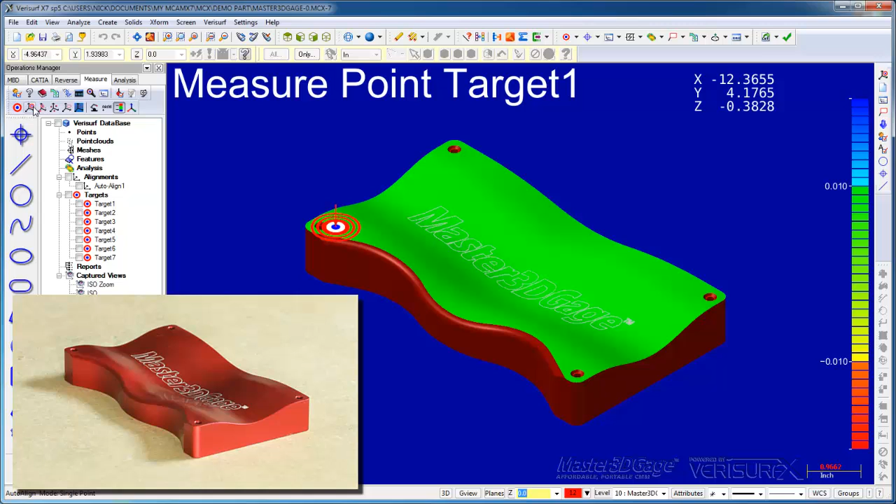The system uses bullseyes to guide me to the alignment points, and when the alignment's complete, I can go directly to inspection.

As I move the probe across the surface, I get an analysis of the deviation between the part and the model.

And when the measurements are complete, I have an analysis of the part. I'll add balloons to it to show the limits, save it, and create a report.

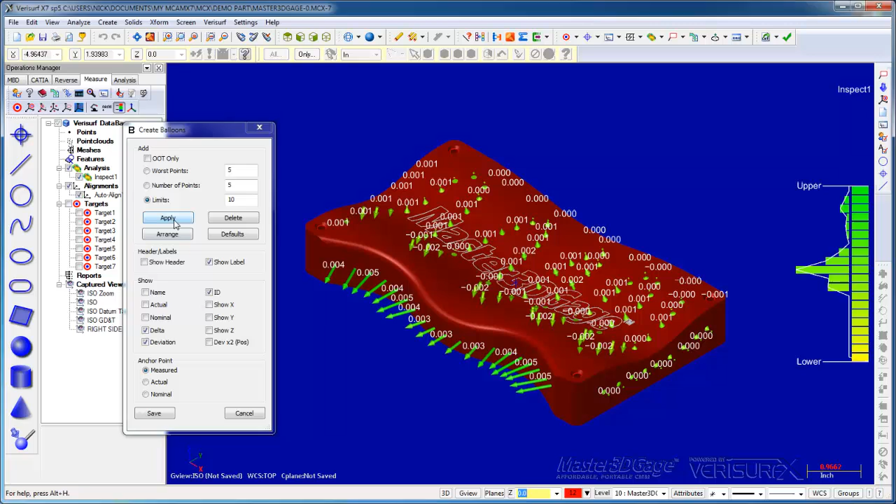When I open up the PDF file, I can see the part's in tolerance and I'm ready to continue my run.

The Master3DGage is the fastest way to align, inspect, and report, which makes it ideal for rapid first article inspections. It supports continuous process improvement.

It eliminates programming, which makes it faster than a fixed CMM for most applications. It provides a common platform for manufacturing and inspection, and it adds tool building and reverse engineering to your inspection tools. Finally, it improves inspection throughput and generally lowers the overall cost of quality.

We've seen an overview of what the Master3DGage does and how it can benefit your manufacturing process. Next, we'll take a closer look at the system.

The Master3DGage system comprises both hardware and software. The gauge itself is a 6-axis articulating arm CMM that uses a hard probe to measure 3D points and point clouds. The arm has a 4-foot volume, or a 2-foot reach in any direction.

It uses a TESA mount that allows us to swap probes without having to requalify. Accuracy is between 2 and 7/10,000ths of an inch for characteristics such as position or length, depending on the size of the object we're measuring. And for characteristics such as form, the accuracy is 3/10,000ths.

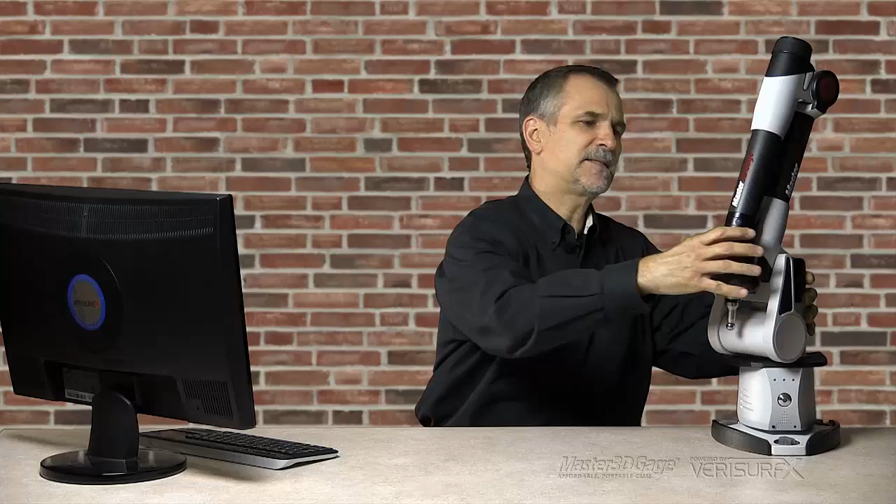Verisurf recently introduced a new and improved version of the Master3DGage, and I want to review the enhancements before we continue the demo. The new model offers the same portability, accuracy, and competitive pricing as the original, and it retains the same basic design. Measuring volume is 4 feet, or 1.2 meters.

Both USB and Wi-Fi communication are available, and the system runs off of either AC or battery power. The new Master3DGage is certified to the ASME B89.4.22 standard. Volumetric accuracy is 25 microns, or 1,000th of an inch, and point repeatability is 14 microns, or just over 0.5 thousandths.

The new Master3DGage also offers a number of design improvements. Absolute encoders enable instant startup, so you don't have to initialize the arm. The TESA mount, which allows quick probe changes, now features a keyless locking system. A new ergonomic wrist and single-piece counterweight make operation even easier.

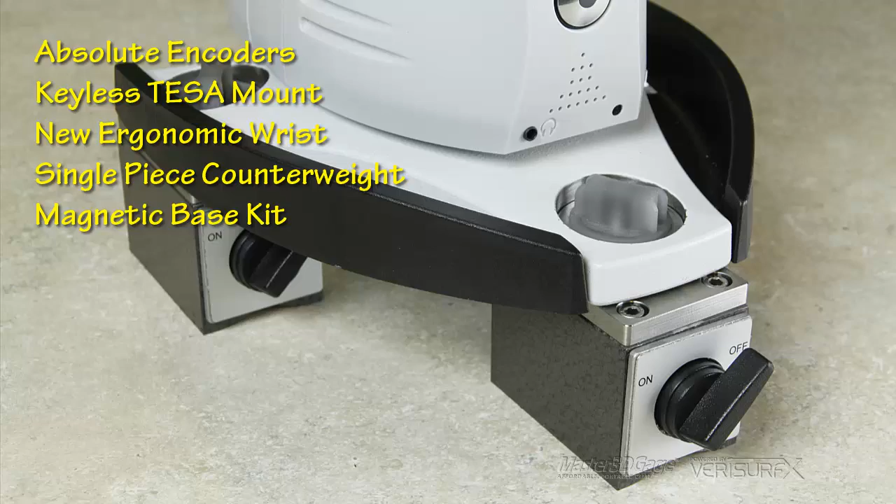The system includes a magnetic base kit for faster and more flexible mounting. The optional certified length bar allows user verification of system accuracy, and we highly recommend it.

The new Master3DGage is still portable, accurate, durable, and easy to use. In the segments that follow, I'll show you how to use Verisurf to align, inspect, build, analyze, and reverse engineer using the old model, but the workflows are identical using the new hardware.

The Master3DGage runs inside Verisurf's metrology software, which is built on a CAD platform, giving us full CAD design capabilities. CAD is important for reverse engineering, but it's also very helpful when inspecting complex parts.

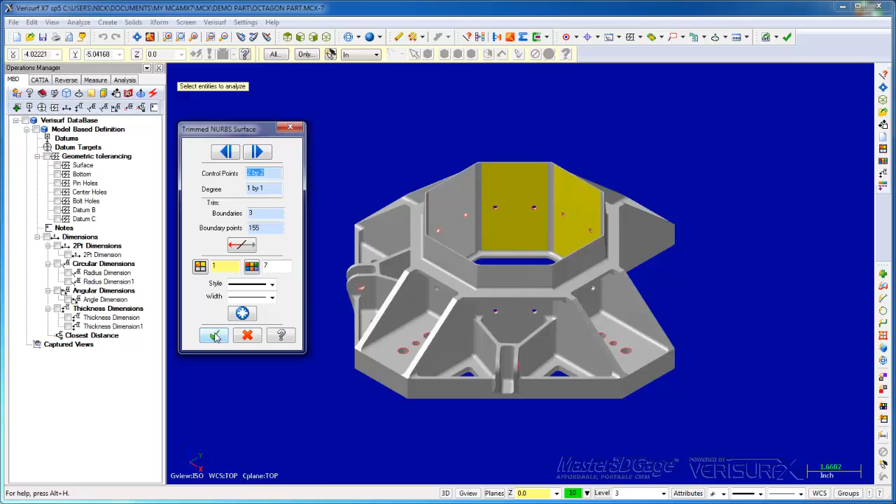For example, we can analyze the elements in the model. We can pull dimensions from the model. We can even manipulate the model, for example, to change or flip surface normals if necessary.

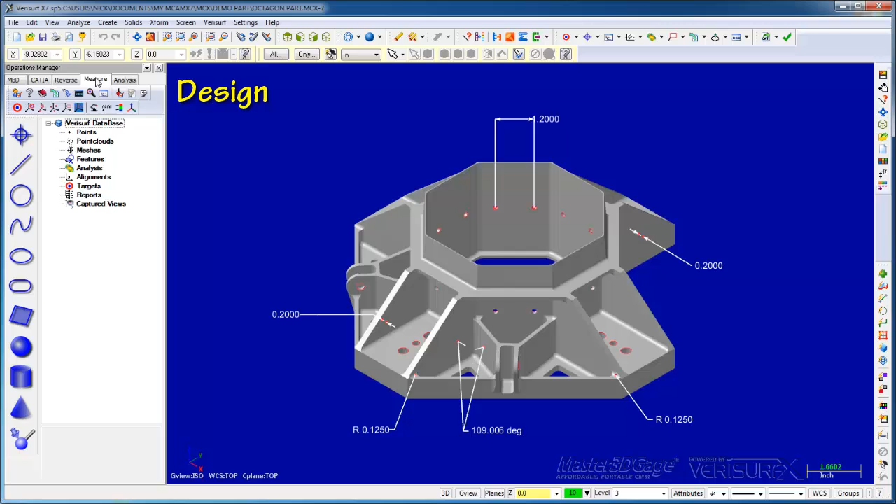Tools such as colors, levels, and attributes allow us to easily manage large part assemblies. Verisurf integrates design, inspection, tool building, analysis, and reverse engineering all into a single application. Finally, Verisurf is designed for both print and model-based workflows.

I'll start by loading a model of our demo part. Verisurf reads all popular CAD files, CATIA, NX, ProE, SolidWorks, in their native format. This helps avoid the limitations of neutral formats such as STEP and IGES, which Verisurf can also read. I'll start by opening a Parasolid version of our model.

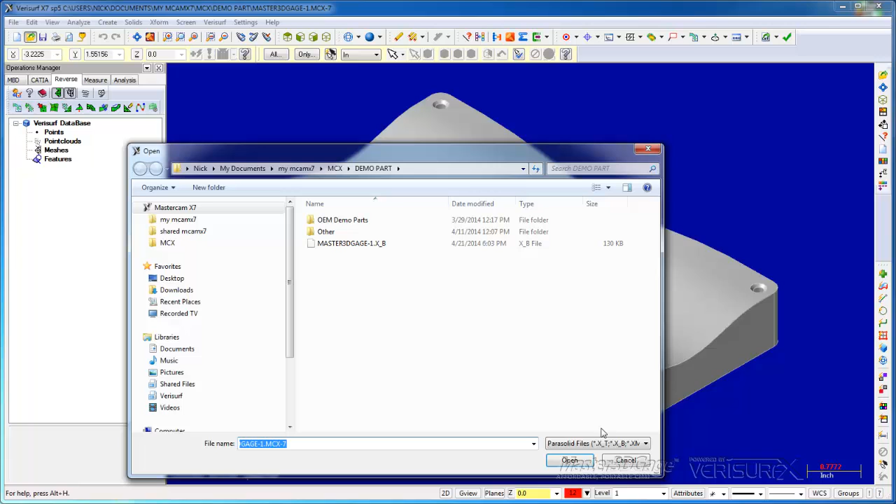When Verisurf loads a native model, it stores it in the MCX format and leaves the original file intact. All of the data we accumulate, measurements, reports, analyses, etc., are stored with the model. Using one file simplifies handling and prevents data loss. I'll reopen our model file using the MCX format.

We have the model loaded and the part is set in place. In the next step, we'll align the Master3DGage to our part. After we load a model, we typically align the device to the part so that we can get real-time feedback on tolerance condition. Verisurf offers a variety of ways to align the device to the part. We'll use AutoAlign since it's the easiest way to align to a model.

We start by creating alignment targets on the part. If our model has datum targets, that's where we place the alignment targets. Otherwise, we position them so they control the position and orientation of the part. I'll choose Create Target and then place 4 targets on the top, 2 on the front, and 1 on the end.

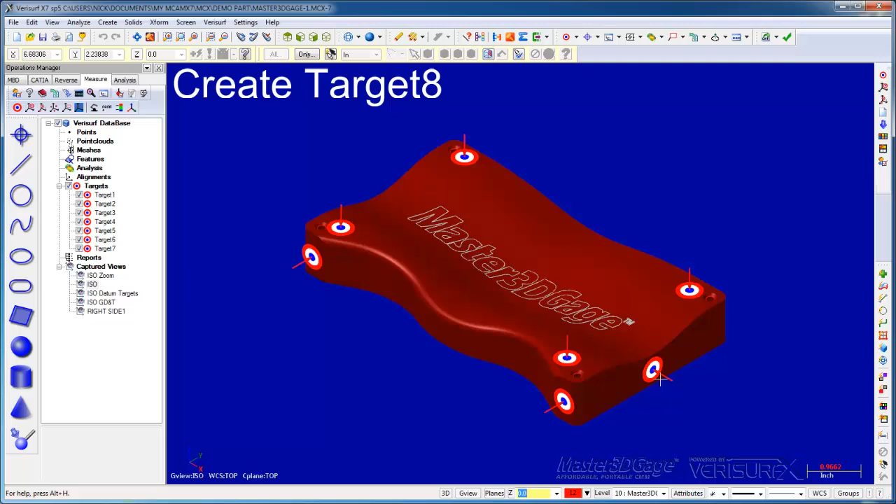To begin the alignment, I choose Run AutoAlign and then follow the bullseye around the part. After the 3rd target, Verisurf guides us to the remaining points. And when the alignment's done, Verisurf best fits the device to the part and shows us the results dialog.

We can use the dialog to review and modify the results if necessary. We can create a report. We can reject and rerun the analysis. And if we choose Auto Accept, Verisurf shows us the dialog only if the deviations here exceed the threshold set here. This is what we normally do. Since the check marks are all green, indicating that the alignment's good, we'll choose Accept.

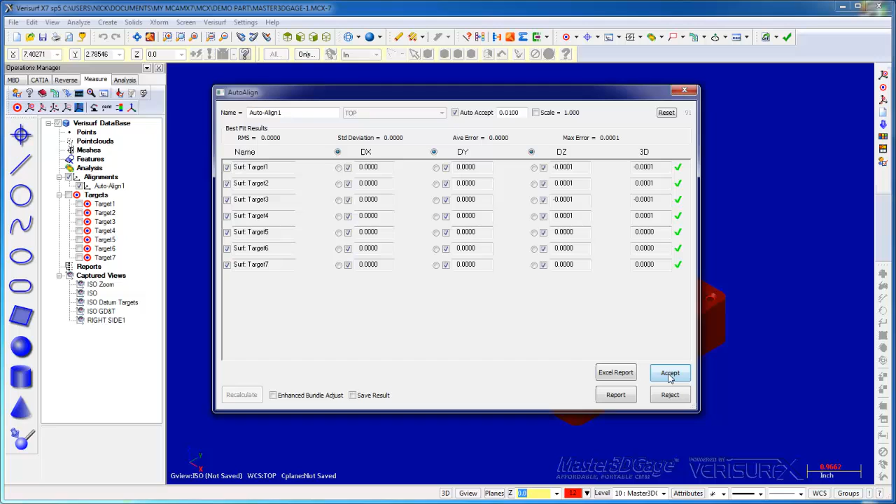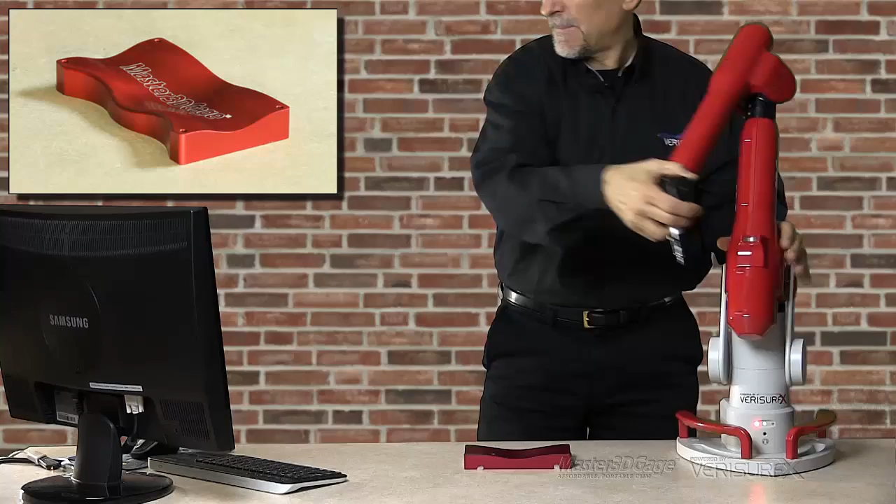And when I do, Verisurf puts us into Inspect Build mode so that we can verify the alignment. As I move around the part, Verisurf shows the deviation between the part and the model.

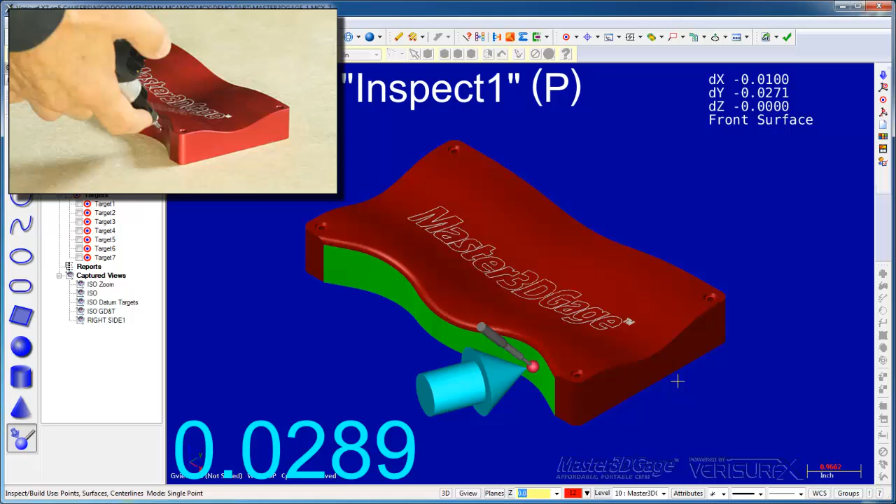This final check validates our entire alignment workflow. In order to see this good of a match, we had to have the right part, we had to have the right model, the device has to be working right, we couldn't make any mistakes. So it's a validation of the whole alignment workflow.

AutoAlign is a very powerful alignment tool, but it's simple enough for beginners to learn, and it has the built-in check of Inspect Build mode to verify the alignment. The gauge is now aligned to the part. In the next step, we'll see how Inspect Build mode calculates the real-time deviation.

We used Inspect Build mode to verify the alignment of our device. Inspect Build is a special measuring mode that shows in real time the deviation between a part and the corresponding features in a CAD model. When we're inspecting a part, the deviation reflects the material condition. When we're moving a part into position, the deviation shows how far to move and the arrow points the direction. Since it serves both purposes, we refer to it either as Inspect or Build depending on our goal.

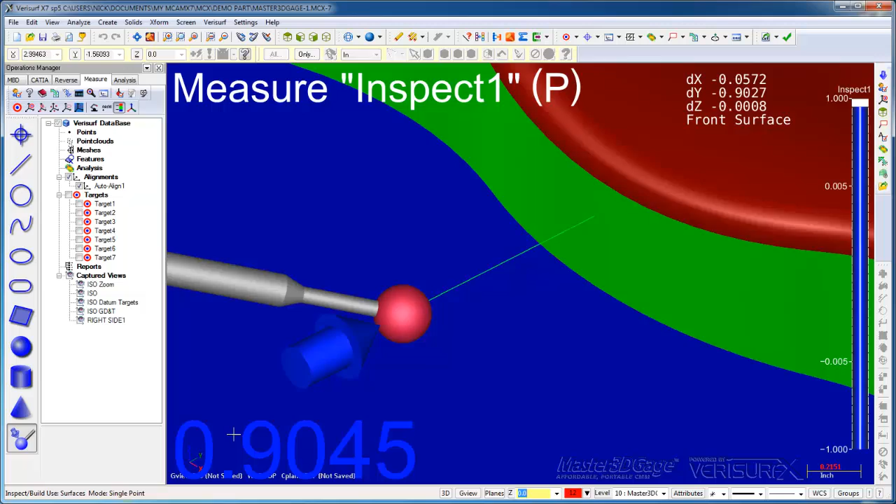As we move around the part, Verisurf highlights the nearest nominal surface and drops a perpendicular from the probe center to find the nominal point. Verisurf then applies probe compensation along that line to find the actual point. The distance between the actual and nominal represents the deviation. When the probe is above the surface, the deviation is positive and the arrow points towards the surface. When the probe is below the surface, the deviation is negative and the arrow points away.

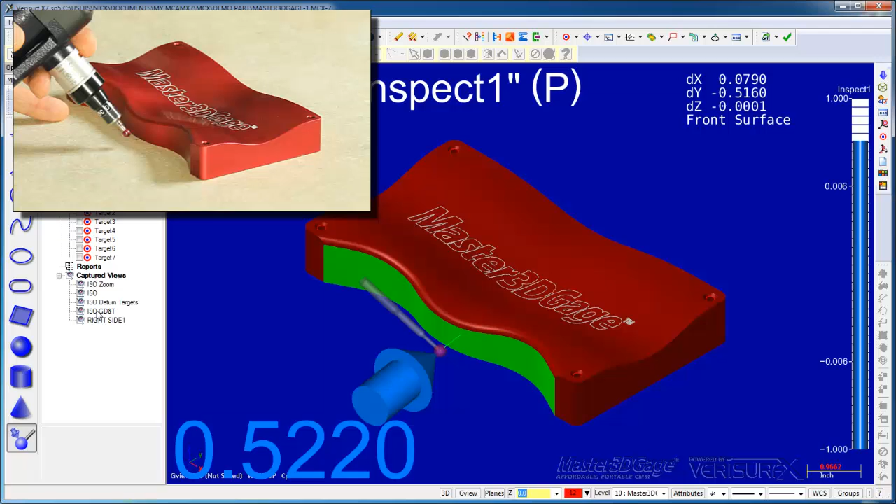As I move around the part, notice how the deviation arrow, the deviation text color, and the slider color all change to reflect the tolerance condition. If I display MBD, notice how the tolerance changes to reflect the highlighted surface. We can also use digital readouts for a more detailed representation of the deviations in build mode.

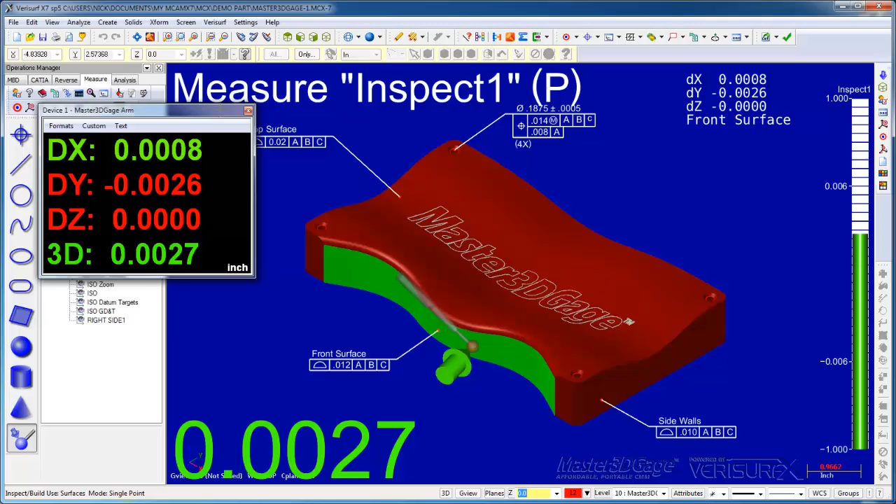We've seen how Inspect Build mode works. Next, we'll use it to inspect and then to position our demo part.

The Master3DGage is aligned to the part, so when we inspect the part, we'll assume the deviations are due to machining errors. I'll run Inspect mode and then check a few points on the top surface, using single point mode. Notice that the deviations are represented as arrows with the deviation text.

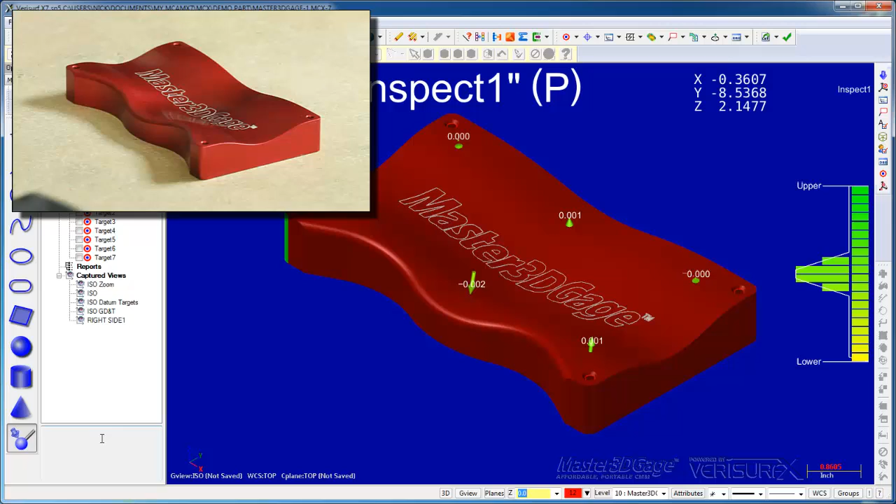If I shim the surface and place the probe on top, notice that the build arrow points down. When I record, the deviation arrow points up. That's because the build arrow shows where the surface is supposed to be, and the deviation arrow shows where it actually is. I'll undo that point and remeasure it without the shim.

When I press Escape, Verisurf creates an analysis object in the data tree. If I highlight it, I can see the distribution of errors in the color bar. If I double-click the analysis object, we can change the way the deviations are rendered.

For example, we can hide the deviation text entirely. We can add borders to the deviations. We can change the arrows to cones or to lines. I prefer arrows, so I'll leave it alone.

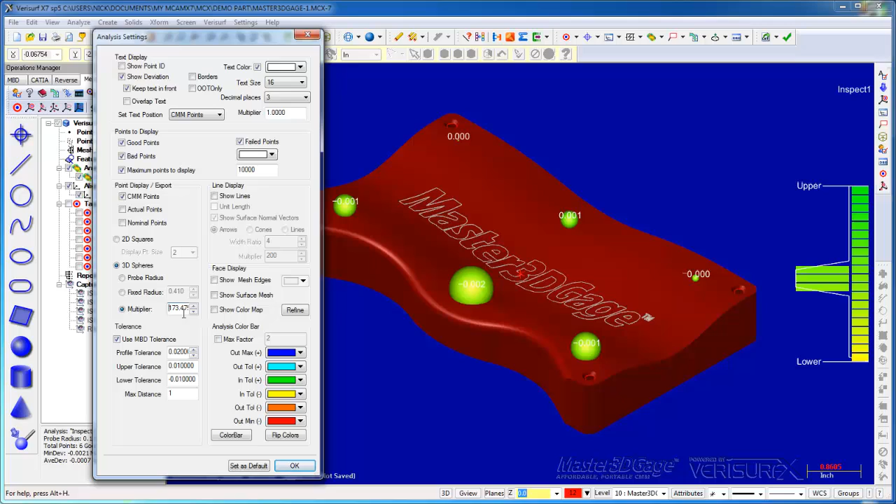We can render it as 3D spheres. We can use the probe radius. We can use some fixed radius. Or we can use a multiplier to make the size of the sphere proportional to the deviation.

Go back to the arrow display. If we enable Use MBD Tolerance, which is the default here, then each point is analyzed according to the surface profile callout in the MBD. If we disable MBD Tolerance, then everything is analyzed according to the global profile tolerance. We'll reselect it.

Once I have the deviations rendered the way I like, I can choose Set as Default, and then subsequent analysis objects will be rendered the same way. I'll go ahead and do that and then choose OK.

I'll now add balloons to the deviation object. I can auto-add balloons and do something easy. I'll just show where the limits are, the two highest and the two lowest points. They're flagged with balloon callouts.

I'll save that. Now I want to create a report. So I'll highlight the object to get the color bar showing. Click the report button, and I prefer to see the screenshot above the deviation text, so I'll change the order. Verisurf gives us a lot of options for how we want to create the report file.

When we create a report object, we have a container that stores the analysis data. We can output that in different formats such as PDF, Excel, HTML, Word, etc. I prefer PDF. One of the reasons being, if we look in settings, we can secure PDF files with a password. If we go to general options, we can use the change logo button and select the Master3DGage icon.

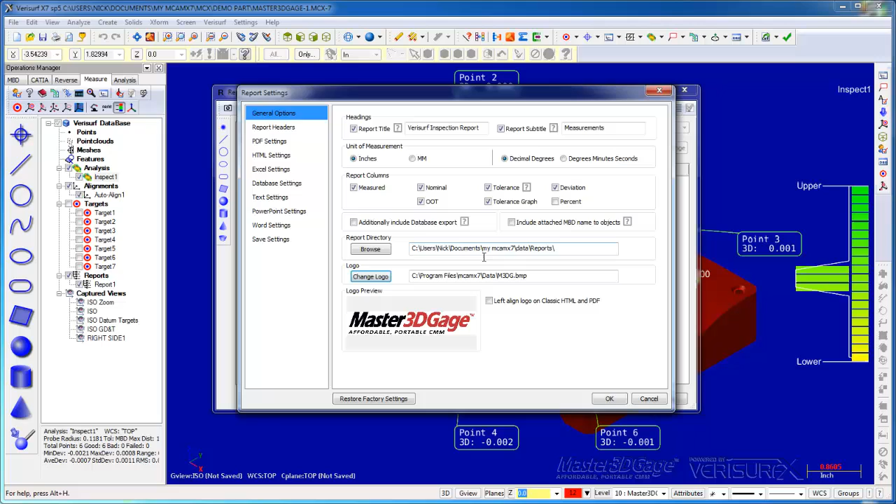So now when we create a report file, we have the Master3DGage in the header. So we have a simple report for a simple inspection, 6 points.

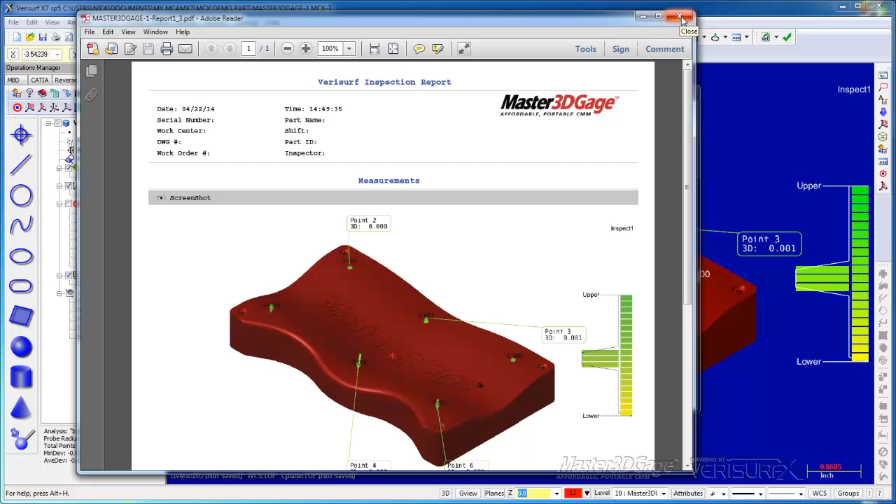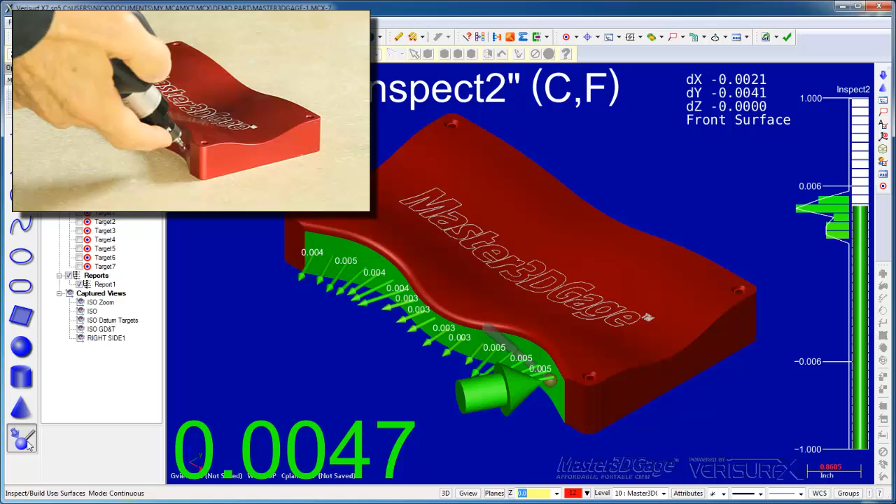We'll close this and then we'll scan the part using continuous scanning. So I'll hide this deviation object, reselect. When I choose P, I can toggle into continuous mode. So as we saw at the beginning, we just scan along the surface, get real-time deviation analysis.

Capture points on the top. And then I'll escape. So now we have a second analysis object. I'll unhighlight that. That was our first. That's our second.

We'll add balloons to the analysis. Only this time we'll add 8. Choose Apply, save the result.

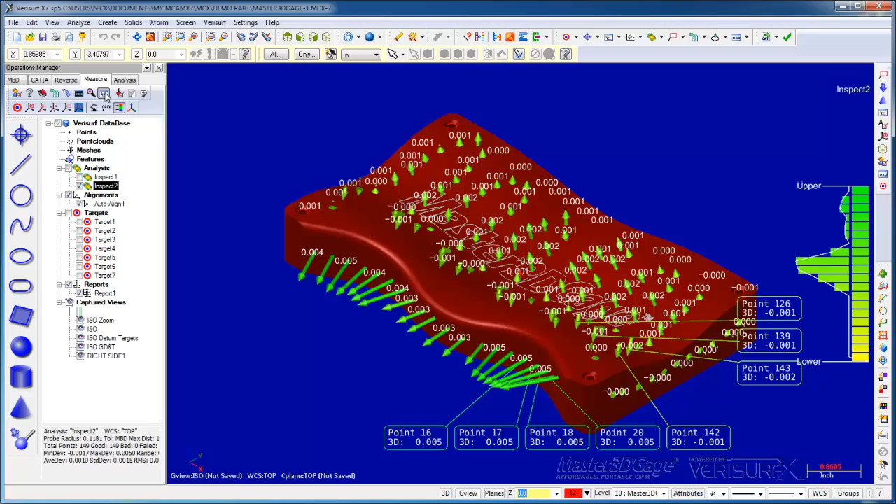And again, we'll create a report. Highlight the object, choose Report, change the order, and again, we'll create a PDF file. So the process is very similar. This time we get a little more data.

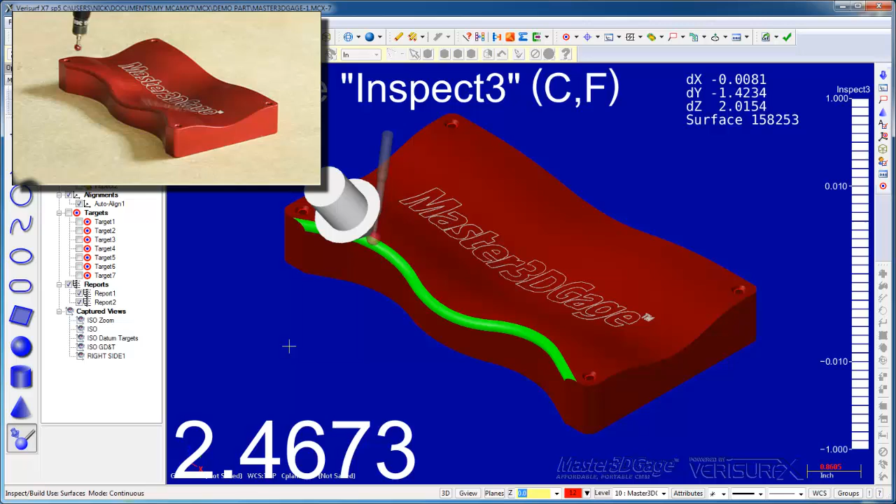Now, you notice that when we were in Inspect Build mode, hide that, and we'll switch back to single point mode. As soon as I record a deviation, the real-time text updates and I no longer see the recorded deviation.

If we want to get around that, we can choose Device Display Settings, Show Static Deviations, and now when we go back into Inspect Build mode and I record a deviation, I don't see anything until I record the point. And then the deviation stays on the screen statically until I update it with another recording.

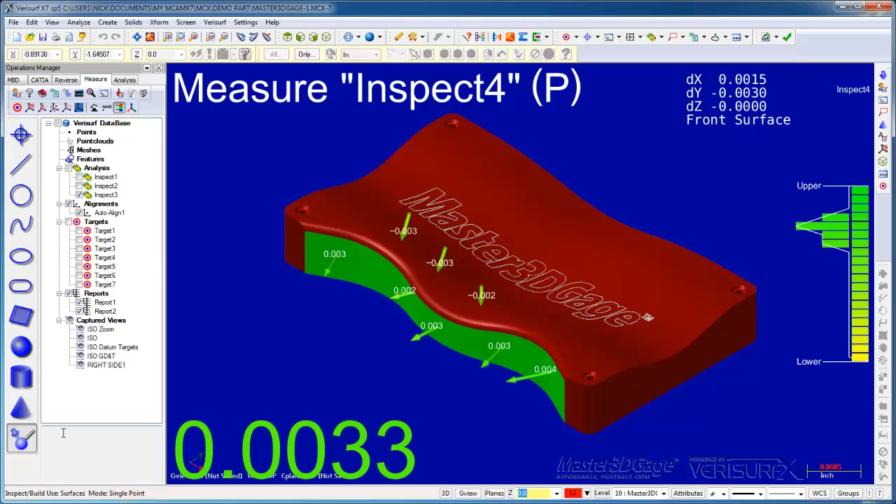So that's helpful if you're working far away from the computer and you can't see the small deviations on the model itself. We've seen how to use Inspect mode to check parts in real time. Next, we'll see how to automate the process.

Using Inspect mode to check a part is very efficient, but we can make it even easier by automating the process. Automation improves process control by ensuring that all parts are checked the same way each time.

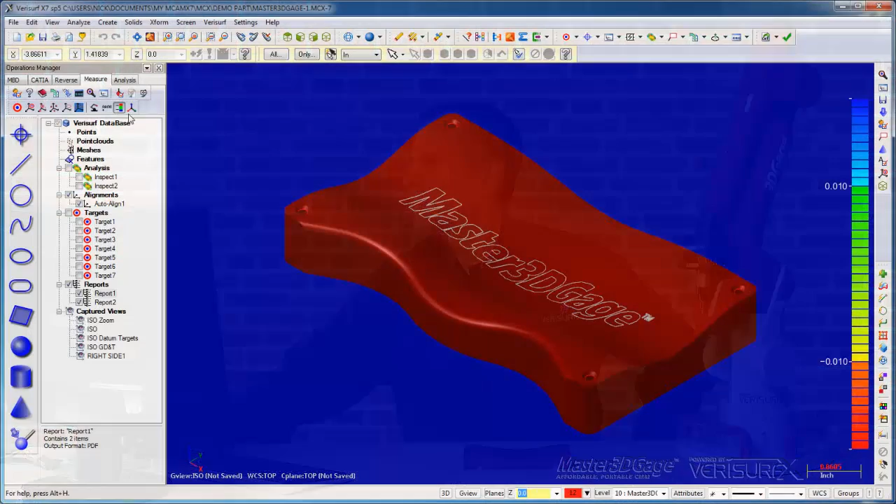If we open Auto Inspect, we can see the two reports that we created earlier. If I double-click on Automation, it opens the Report Manager, and if I run the report, we can see it's identical to the first one we created. In Verisurf, creating an automation is the same as creating a report.

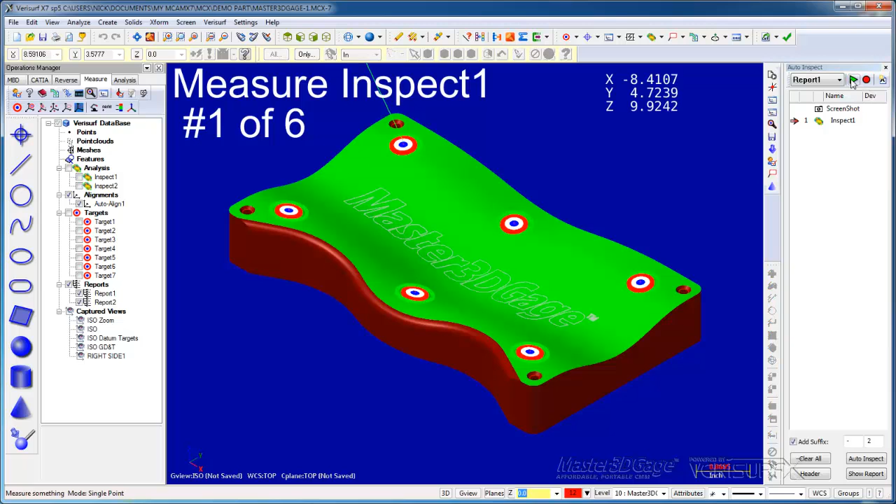To run the inspection, we choose Clear All and then select the green Run button. Verisurf targets the inspection points just like in AutoAlign. I have this set to automatically record as we pass by the point, so I don't even have to trigger it.

When the last target's measured, the inspection is complete, and we can create a report just like we did before. Now this process works well if we can fixture each part in the same orientation.

As an alternative, we can even automate Auto Inspect so that the alignment is part of the automation. For example, I'll open the report for this automation, highlight the targets, choose Command, and then I'll move AutoAlign up to the top of the list.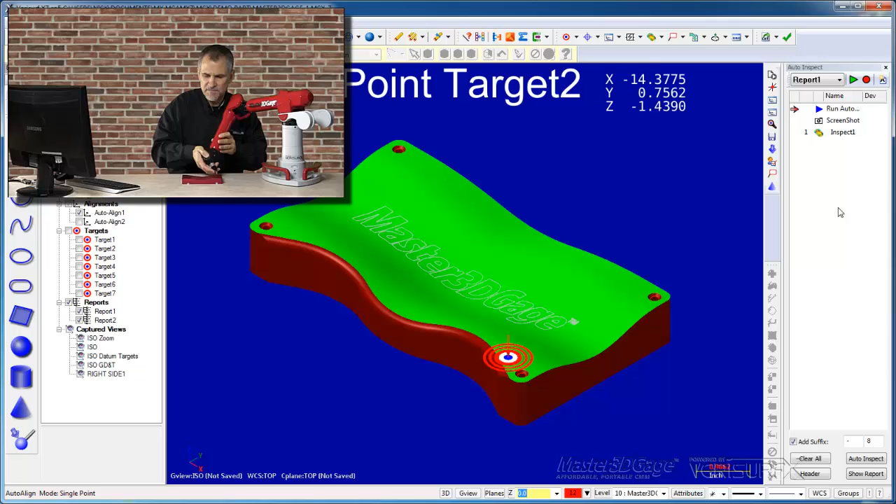Now when I run Clear All, and run the automation, we're first guided to measure the alignment points in AutoAlign. And when the alignment's done, we're prompted to measure the targets.

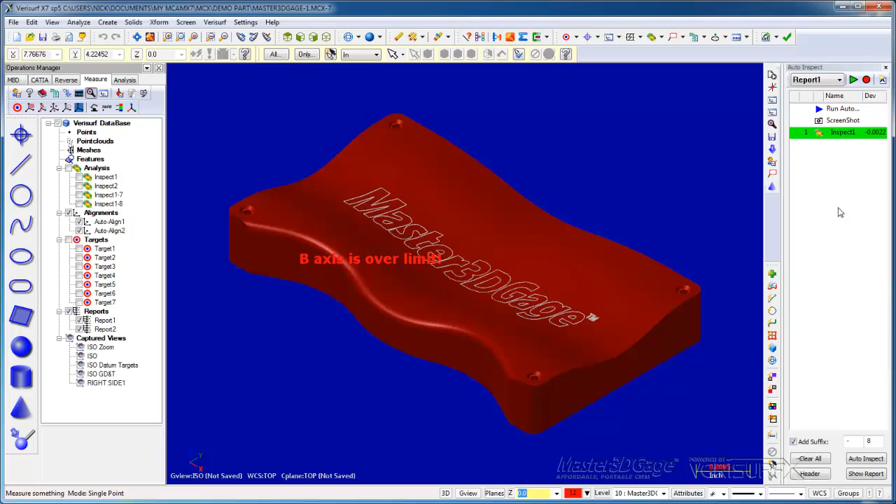We've used real-time deviation analysis to inspect surface profile. Next, we'll use it to position our demo part.

When we position a part using build mode, we assume the part is good and the deviations are due to errors in the position of the part. We refer to this use of real-time deviation analysis as build mode because it's often used to build tooling and assemblies. However, build mode is not restricted to building tooling. We use it anytime we want to position an object in 3D space.

Normally, we'd align the device to the basis of the model by measuring features with known CAD values. We'd then use build mode to position physical objects by moving them to their nominal locations. Since we're already aligned to the basis of the CAD model, I'll simply move it and we'll build it back into position.

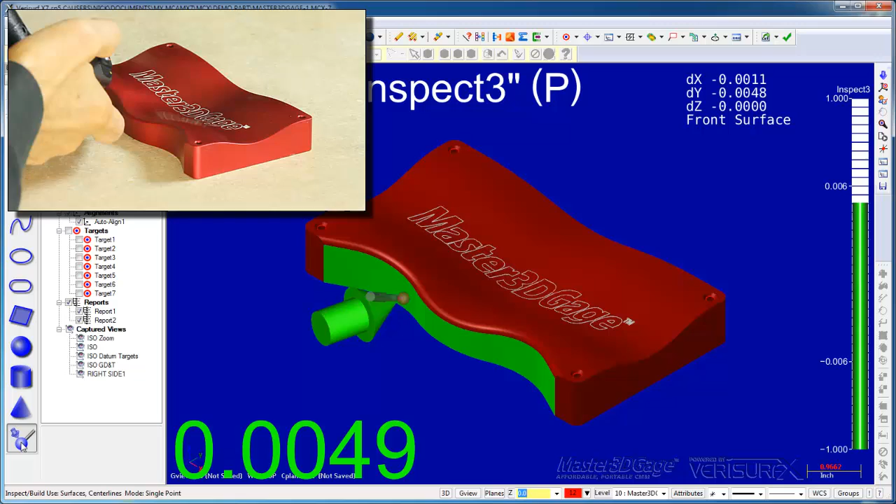I'll start by running inspect build mode to verify the alignment of the device to the part. Looks correct. Now I'll move the part off slightly and we'll move it back into position.

I'll start by selecting the circles and building to center lines. This is a quick way of getting the part roughed in.

Put the probe in the hole and move it in the direction of the arrow. Get it close. The trick here is to move one without the other.

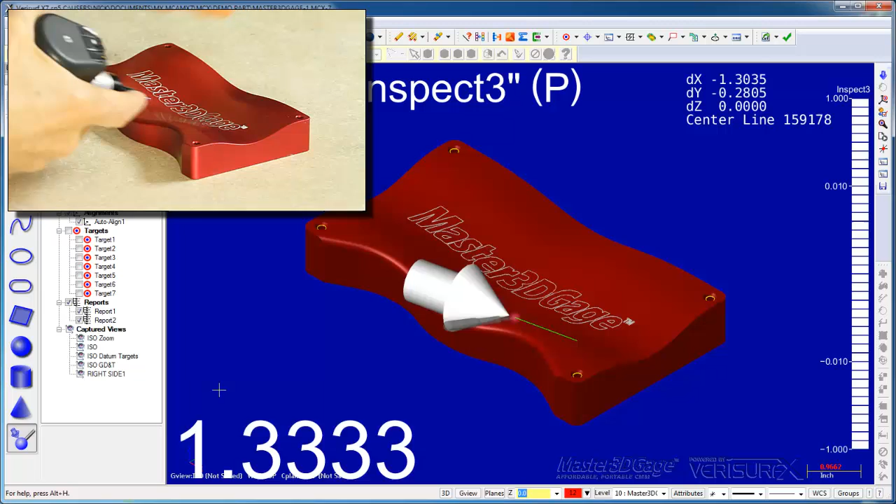Once we get it close, cancel out, escape out of the circle selection, and then we'll build the surfaces. Before we do, I'll turn on the GD&T.

And get it a little closer.

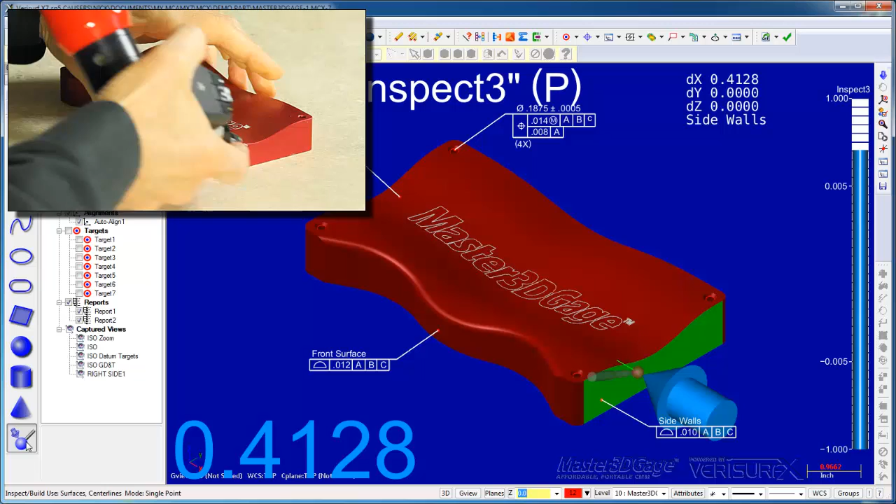We can use the surface profile to control our build tolerance. In other words, as long as the surface profile shows up correct, we'll consider that the part is in the right location.

There's always a tendency to want to build to zero, but what we want to do for economic reasons is build to green. We want to position the part so that it's in tolerance, not necessarily so that it's perfectly zero everywhere. I'd say that's close enough for what we want to do.

This is obviously a very simple example of a build application, but the same technique is used for more complex structures. The part is now in position. We left it out slightly. In fact, we'll tweak it a bit more so that we have something to do for our next step.

We've already seen how to use inspect mode to check our part in real time. In this step, we're going to repeat the same analysis using measured point clouds. I'll start by measuring point clouds around the sides and the top.

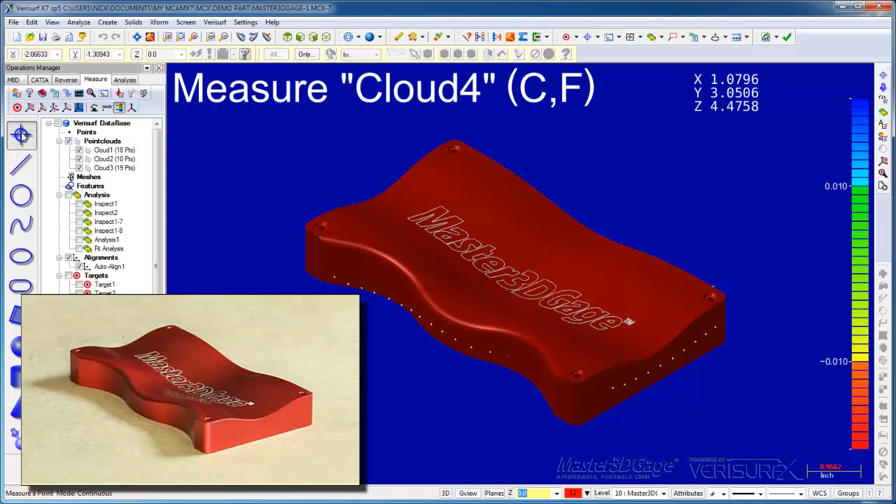Notice that this time we don't get deviations in real time. The point clouds are just raw probe center data.

So now we have essentially the same measurements we took before. We need to analyze them. On the Analysis tab, I'll highlight the point clouds and choose the Analyze button.

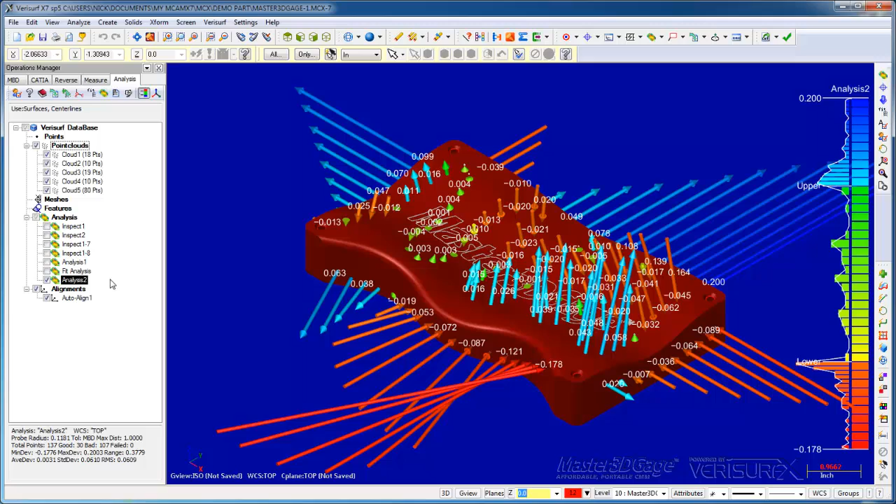We get another analysis object. It's similar to what we saw before, but the deviations are much larger because we left the part intentionally unaligned in the last step. We know the part's good and the large deviations are just due to a misalignment. I'll hide that analysis object, select the point clouds, and run a best fit.

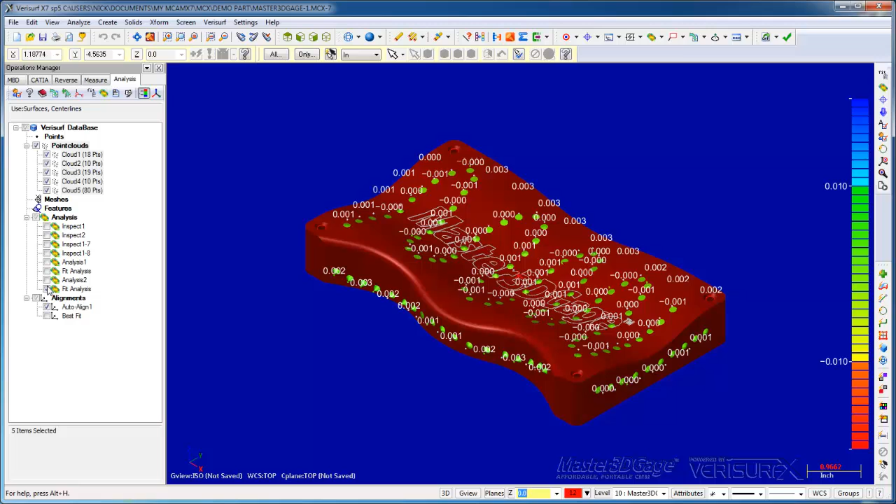Before we do, I'll analyze the data to get a starting point and then run the fit. When the fit's complete, we see the improvement, and we can toggle between them to see the before and after.

Also notice that if I go to the Measure tab and run Build mode, we should see large deviations because we left the part out of alignment. But because the best fit is also applied to the device, it's aligned as well.

We've already seen how to add balloons and create a report. We won't do that on this analysis object. Instead, we'll see how to analyze existing data.

I'll save our current file, and then I'll browse to the model. Now I want to load the point cloud that we want to fit and analyze.

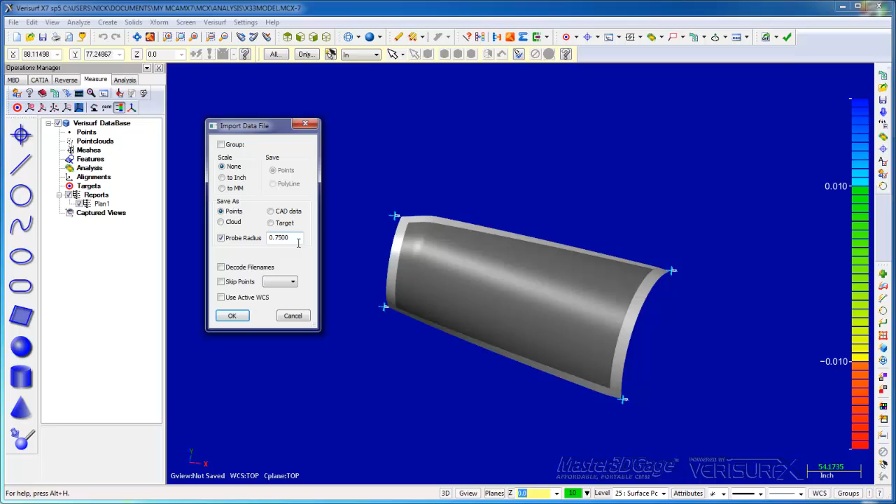I'll bring in the data, and I know that it's probe radius 750. It's laser tracker data, so I want to make sure to enable that and enter the correct value. When I choose OK, I now have a point cloud and a model.

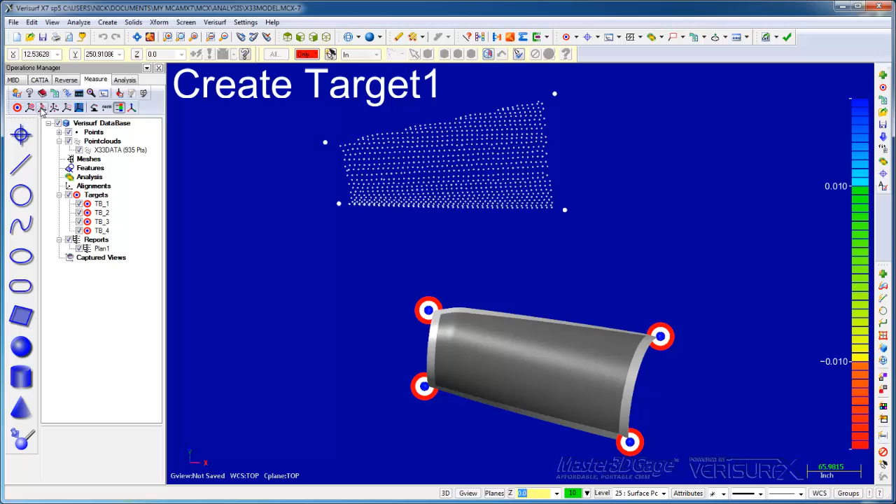The first step is to create AutoAlign targets on the points. And then I can run an offline AutoAlign to fit the data to the model. And when I choose Accept, now they're aligned. It's slightly off from the 750 probe radius, which is correct.

Now all I have to do is go to the Analysis tab, choose the point cloud, and run Analyze. So we can take data that we measured directly within Verisurf. We can also analyze data that's given to us from other sources. Inspect mode, which we saw previously, and Analysis, which we saw here, are very powerful tools for model-based inspection.

Next, we'll measure and analyze prismatic features.

The workflows we've seen so far have all been model-based. We aligned to a model, we inspected the surfaces in the model, and we used model-based probe compensation. Next, we'll look at print-based analysis and reporting of prismatic features.

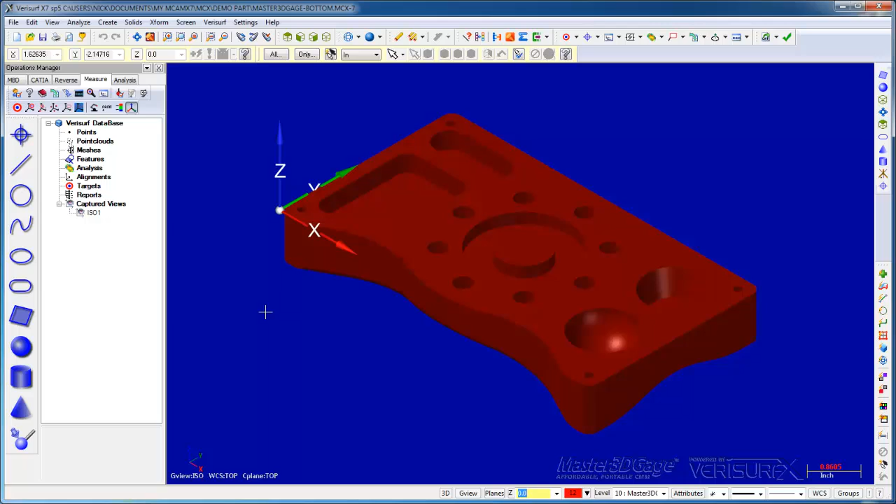We'll align the Master3DGage to the frame of reference shown on the CAD model here, but since we're not going to use the model, I'll open a blank file.

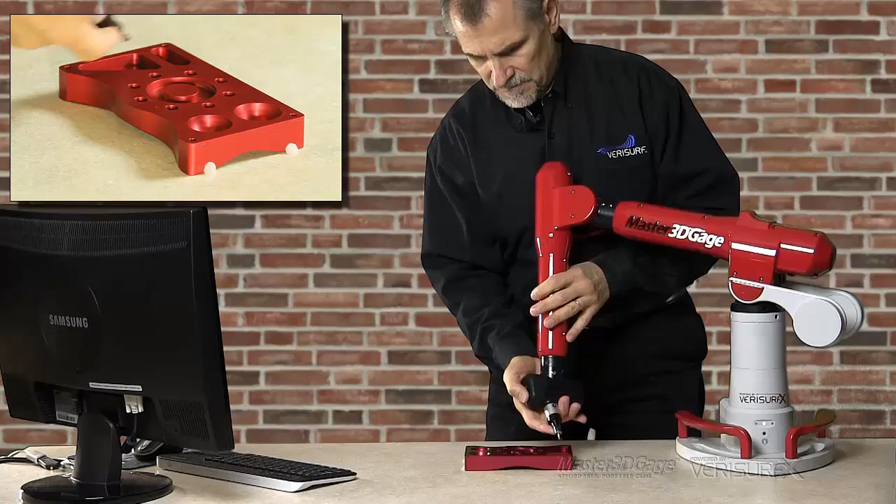I'll start by measuring a plane on the top of the part. We'll use that to define X, Y. Then I'll measure two lines, one to define X and the other to define the Y axis.

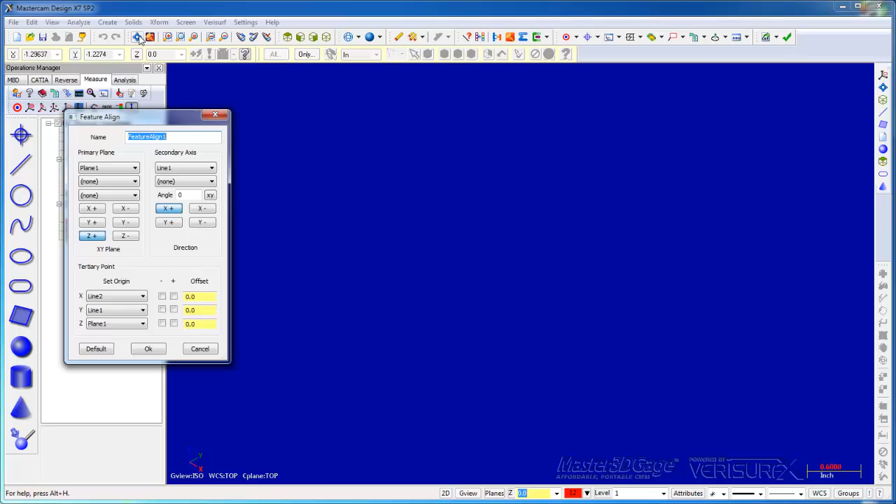Press Escape, look at our data. Now I'll run Feature Align. That looks correct. If I choose F9, I can see the alignment is at the world frame.

And if I go into point mode, place the probe at the origin, I can see the Master3DGage is also aligned.

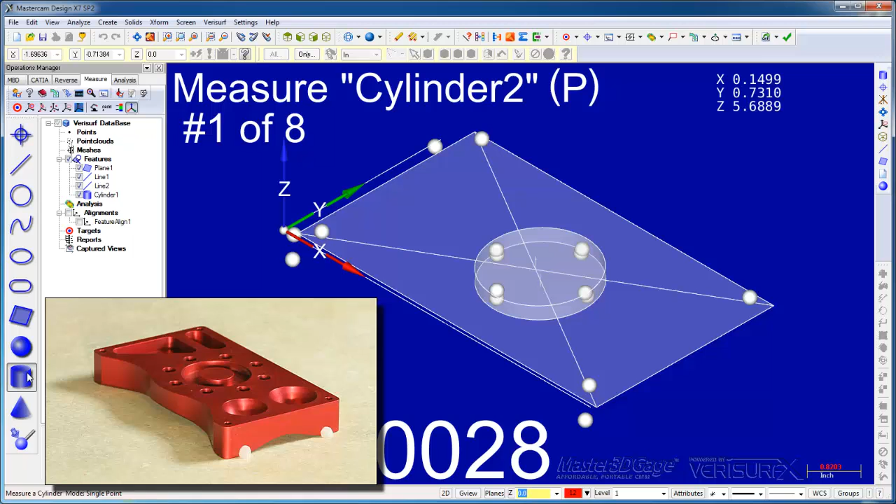We'll start by measuring a few features. I'll begin with the cylinder on the ID circle. Then I'll measure a cone. Then I'll measure a slot.

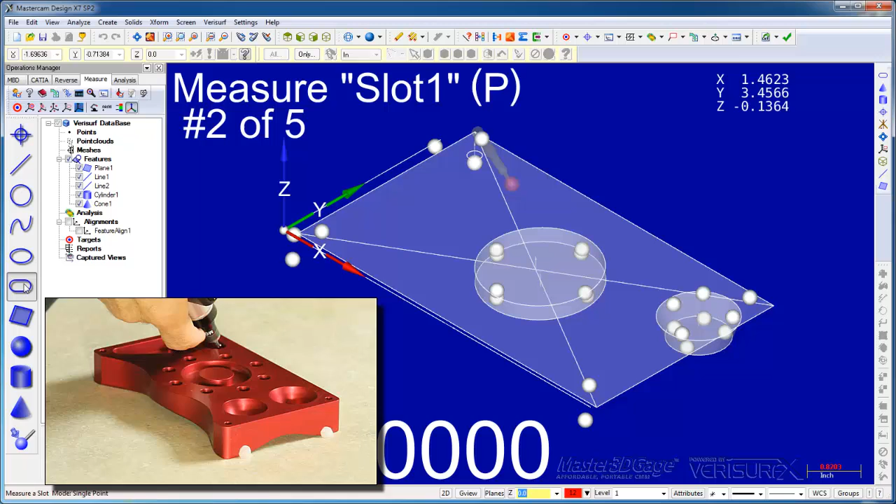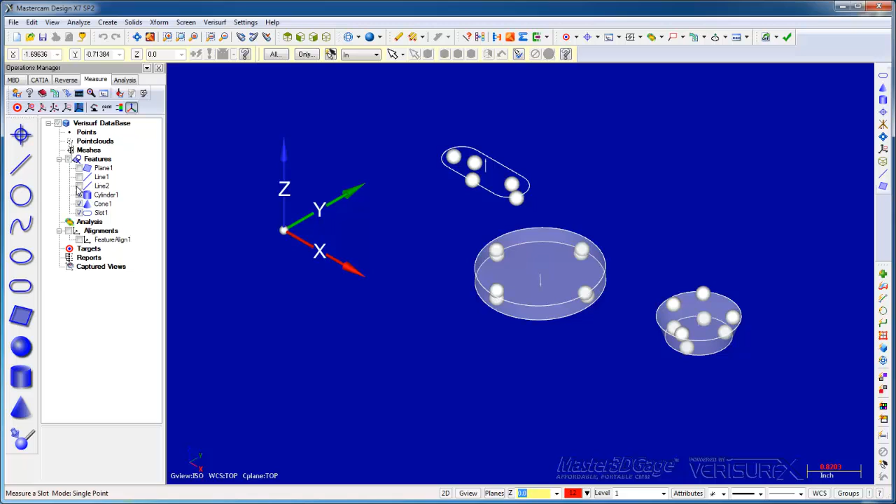I'm displaying the feature measurements as probe hits so that we can see how probe compensation is accomplished. Go into top view, look at the data. We can see that the slot is tangent to the outside of the probe hits, which makes sense because we measured the slot on the inside. Same with the cylinder and same with the cone.

For 2D features such as slots, Verisurf uses a combination of projection planes and the feature itself for probe compensation. And for 3D features like cylinders and cones, Verisurf uses the geometry of the feature itself.

We'll continue on with sphere measurement. At this time, we'll switch into continuous mode. Press done. I see the sphere, I see its form.

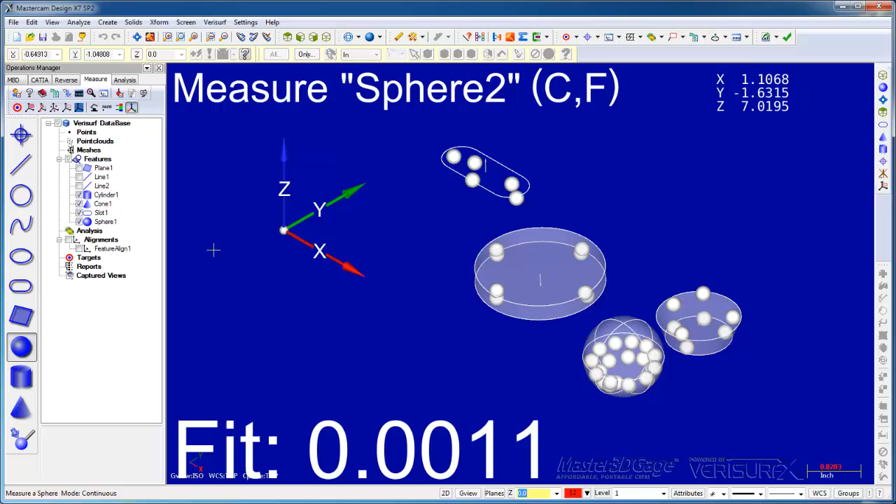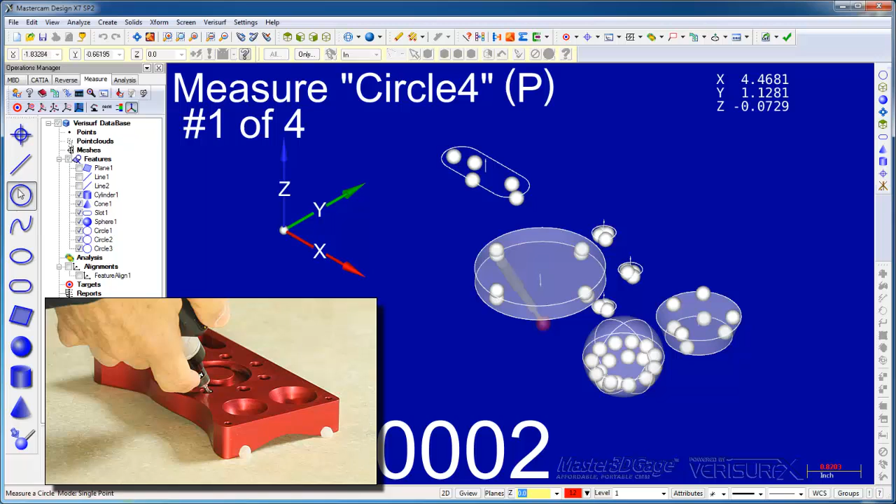Continue on with the hole pattern. If I make a mistake, I can hit U to undo the last probe hit and continue the feature. And if I don't catch the mistake before the last measurement is made, I can press undo to delete the whole feature and remeasure it.

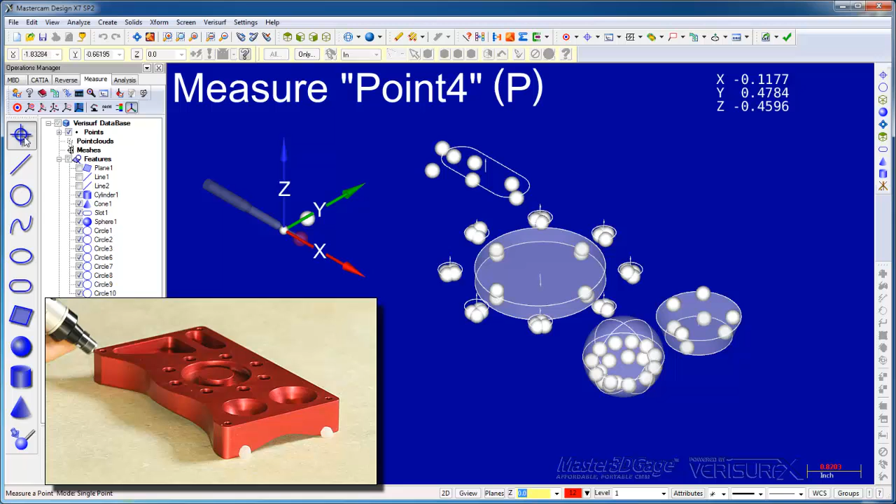I'm going to switch to point mode to measure the two end planes. We'll start with the left end and measure it as 4 points. For the right end, we'll measure it as a point cloud.

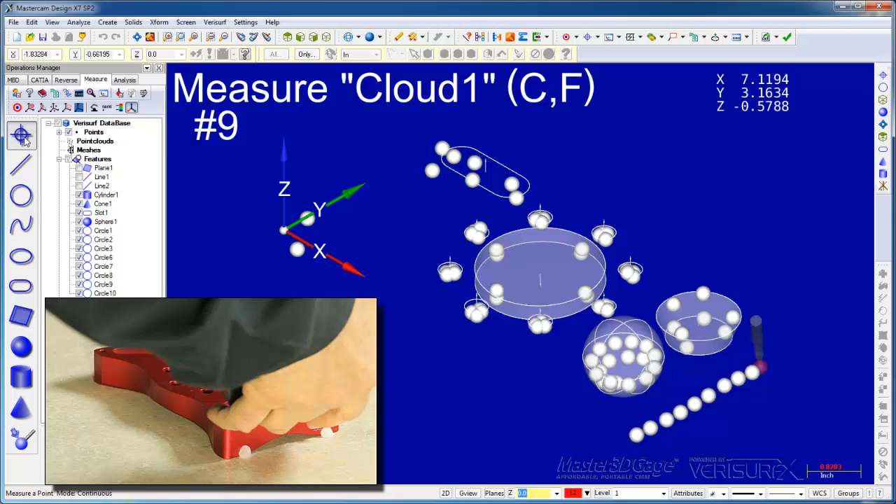We'll take the 4 points and fit them to a plane. We'll do the same thing with the point cloud. Right click, fit plane.

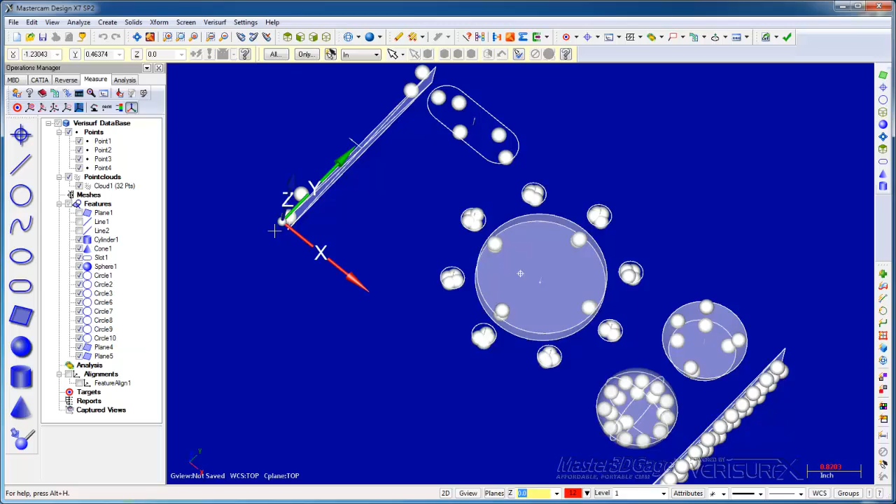Just like the other features, the probe compensation is done in the correct direction. If I use the statistics button to analyze the data, Verisurf tells me there are no CAD entities, and that makes sense because everything we see on the screen right now is measured.

I'll select all the features, choose Export to CAD, blank the database. Now if we go back, we can see that CAD features have been created for all of the measured features. We also have the option of creating CAD features on the fly, but that's more of an application for reverse engineering. I'll undo the CAD features,

Redisplay the database.

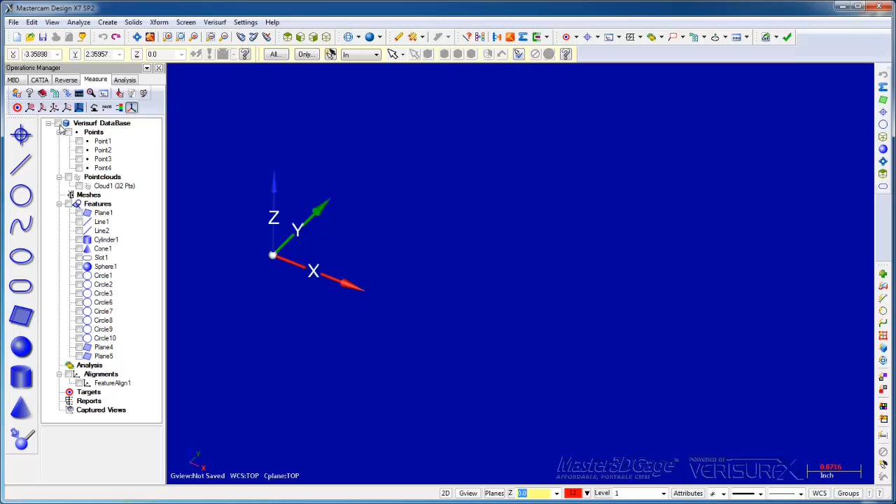The statistics box at the bottom of the data tree allows us to get a real quick report on relationships or characteristics of single features. For example, if I pick one feature, I get characteristics such as its form, size, position, which alignments it's using, etc. If I pick two features, I get the relationship between them, such as the angle and distance between circles, or the angle between lines. It's a quick way of doing a check without reporting, which we'll see next.

We've seen how the Master3DGage measures prismatic geometry. Next, we'll see how to analyze and report the results.

We briefly saw the report manager when we reported our analysis and inspection results. Now we'll take a closer look as we analyze and report our measured features.

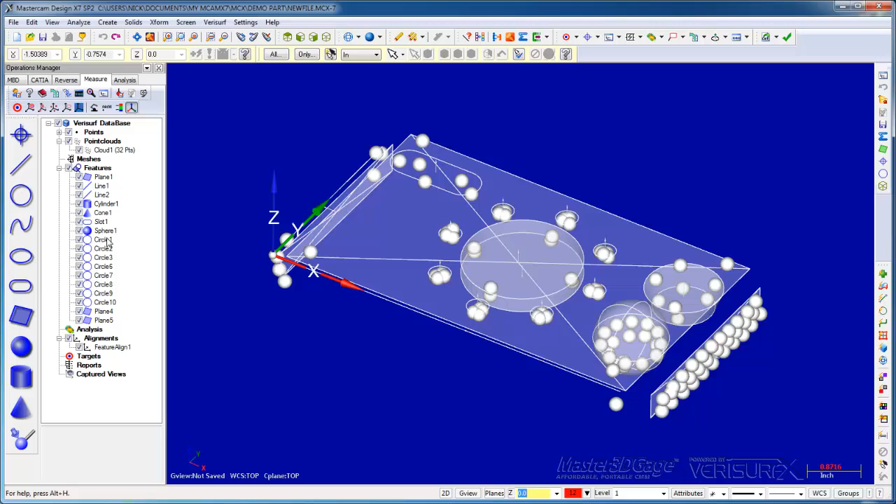For this report, I'll use the circles of the hole pattern in the two end planes. Select the features, choose the Reports button, and the data appears in the Report Manager.

If I select a single feature, I can see its characteristics in the Details pane. We use these fields to change the nominal and tolerance values. I'll change the nominal for Circle 1 so that we can report its position.

The toolbars in the Report Manager allow us to create CAD values, to construct measured features, and to add GD&T callouts to the report. I'll use the Construct toolbar to create first the plane and then the circle through the hole pattern. I'll select the circles, choose Construct Plane, and then with the same selection I can use Construct Circle.

Next I'll construct a line from the center to Circle 1 and Circle 2. Select the center, Circle 1, choose Construct Line, and then do the same thing for Circle 2.

I now have the two lines. I can select them and calculate the angle between them. I know the nominal should be 45, so I'll enter that.

And now I'll construct the distance from the overall circle to Circle 1. Construct distance and enter its nominal value.

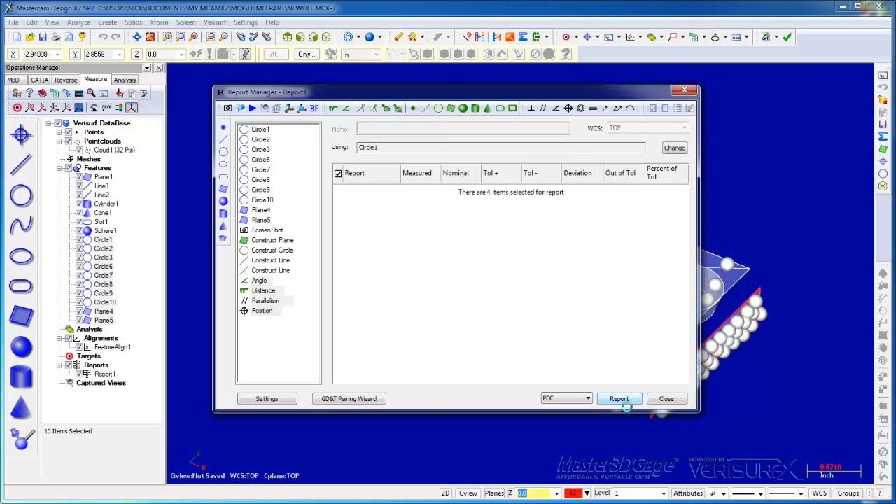I only want the final values, so I'll highlight them before I create the PDF file. So there's our report on the prismatics using the Master3DGage logo.

I referred to the measurement, analysis, and reporting of prismatic features as a print-based workflow, but it works equally well, if not better, with a model.

I'll use the merge function to merge in our original CAD file. Since we use the same part frame for our alignment, the data is already aligned to the model. I'll remeasure one of the circles.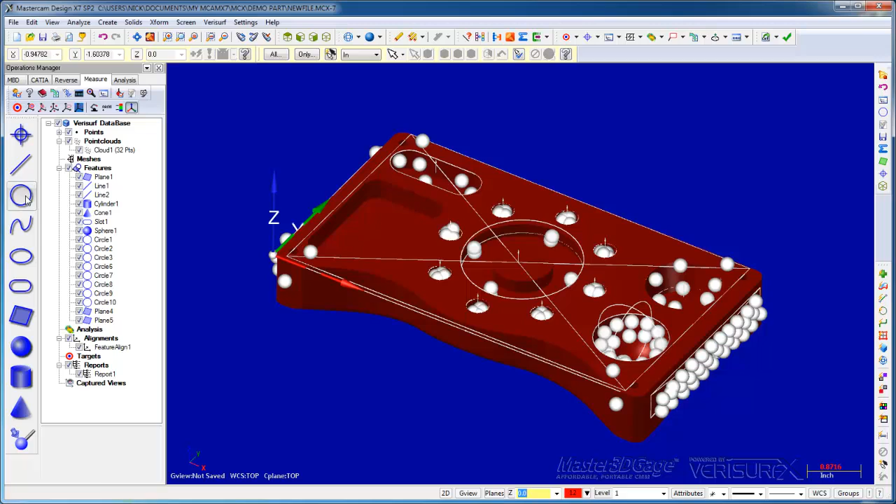And then add it to our report. If I highlight the circle, I can see that the CAD values are already defined. In this case, since we were aligned to the model before we measured the feature, Verisurf automatically associated the nominal circle with the measured circle and entered it into the report manager.

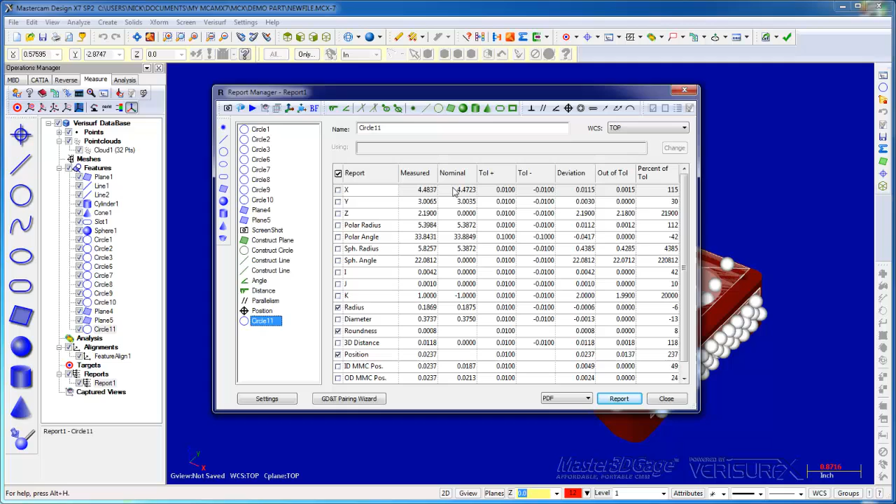If we want to add nominal values to existing features, we can, for example, right-click a circle, choose Set Value from CAD, and then choose the circle out of the CAD model. Now the nominal value is defined.

Our report displayed results in the single part frame to which we were aligned. Next, we'll see how to report in multiple frames using the WCS function.

A WCS is a frame of reference we create on a model to define a new view of the CAD features. In a print-based workflow where we don't have a model, we use WCS from measured features to construct a frame using measured data so that we can report in multiple datum alignments.

Let's say our print requires that we report the whole pattern based on the top plane, the constructed circle, and circle 3. I'll take the constructed circle and export it to measured so it appears in the data tree.

I'll run WCS from measured features. We use plane 1 to define the primary plane. The line from the constructed circle to circle 3 defines the axis, and the origin is set at the constructed circle center. When I choose OK, we see the WCS defined at the center of the whole pattern.

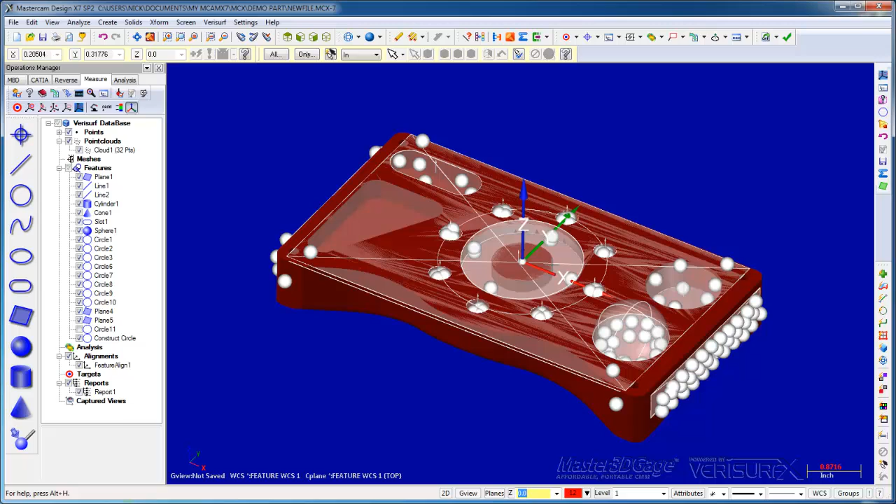Now, if we open the report, we can change the WCS for any of our features to report in the new alignment. I can change multiple features at once by selecting them and then choosing Update WCS from the Speed menu.

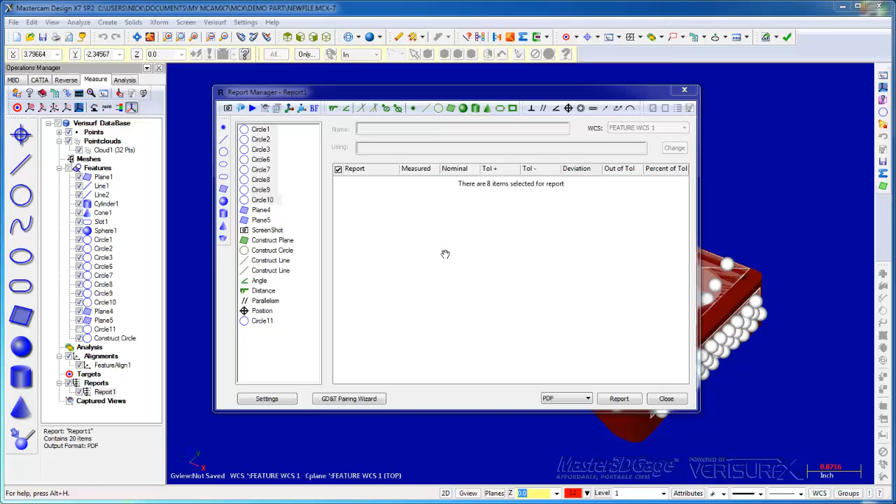When we generate the report, Verisurf displays the WCS that's assigned to each of the features.

We've covered just a fraction of Verisurf's capabilities for measurement and reporting. The reports we created here can be automated as we saw earlier. With multiple feature types, formats, and settings, we can measure, analyze, and report just about anything. For the next step, we're going to reverse engineer a part.

Verisurf's reverse engineering tools enable mixed modeling using prismatic features, meshes, surfaces, and solids. Moreover, we can take advantage of the many CAD design tools inside Verisurf. For this example, I'll scan and then surface the top of the demo part.

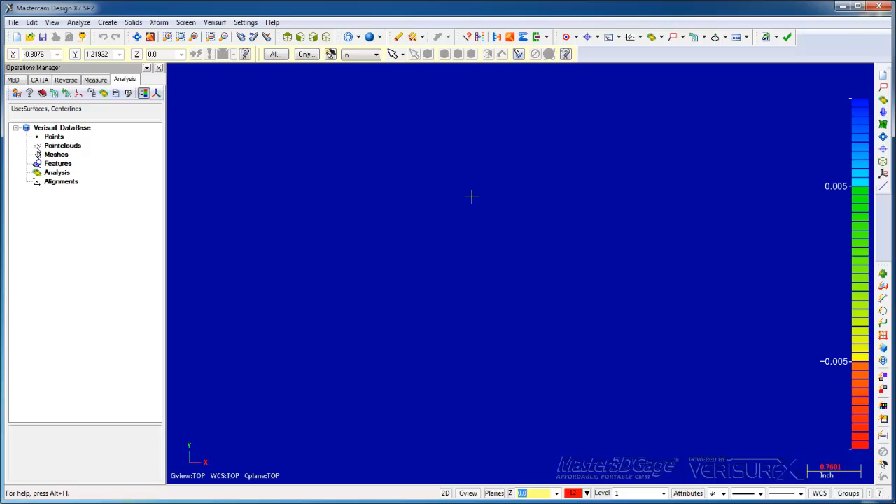I'll start by measuring a reference for our part. I'll measure the plane on the table. And then I'll measure 2 lines for the axes. This isn't strictly necessary, but it's always nice to have a basis of reference for our data.

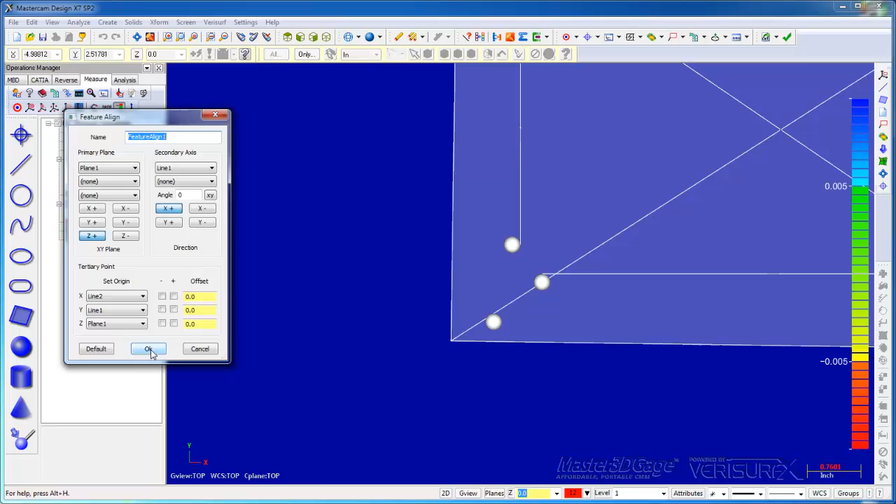Escape, choose feature align. Everything looks right. Turn off our features. Okay. Now we'll scan the top using continuous mode, 1/4 inch spacing, gather a couple of hundred points.

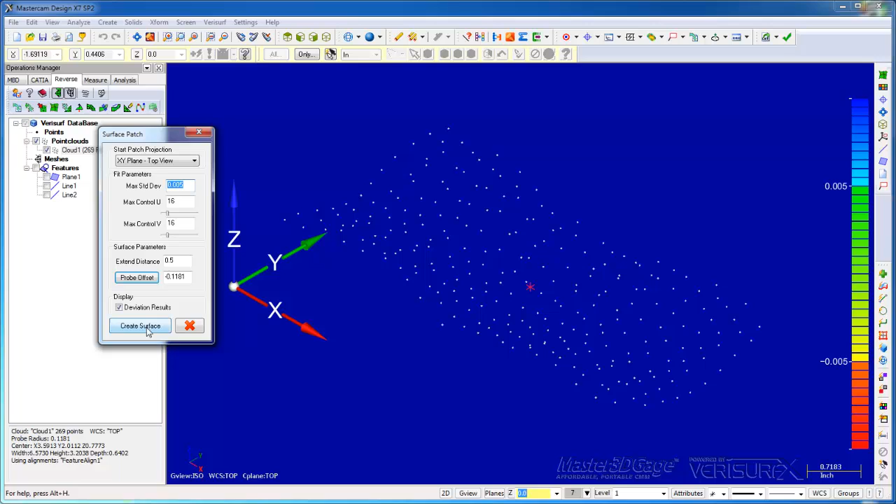On the Reverse tab, I'll highlight the cloud and choose Patch. The fit parameters allow us to control the accuracy and the complexity of the surface. I'll verify the probe offset, and then choose Create Surface.

When the surface is created, we can look at the standard deviation and the UV control, and they're within the parameters that we set, so the surface looks good. I'll accept the results.

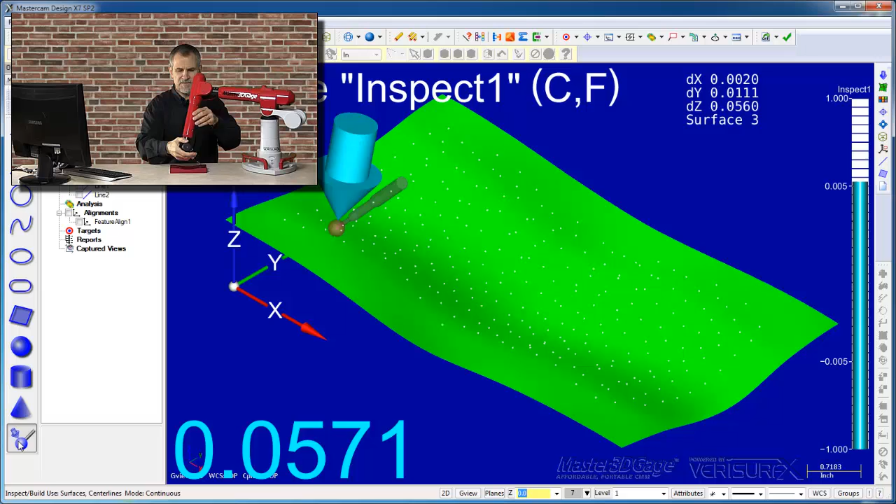So we have a surface that the parameters indicate is good, but how can we check it? If we go to Measure, we can run Build Mode and check dynamically how well our calculated surface matches the part.

That check looks great. Another way to do it, escape out of Build, we can go to the Analysis tab, select the cloud, and analyze it. Again, it looks good. The color bar indicates all the points are in tolerance.

If we wanted to, we could then create a report that showed the accuracy of the surface. The data from the Master3DGage is traceable, so we have a way of creating a report and proving the accuracy of the surfaces that we create.

Being able to measure, reverse engineer, and verify is a great benefit of having an integrated metrology solution.

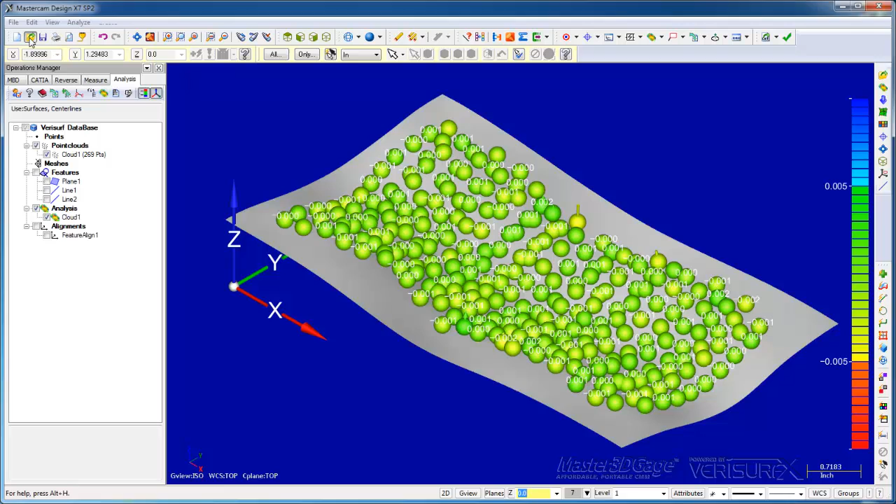For the second example, I'll surface an existing mesh. I'll open the grip file. We don't need to save what we just did. And now I have a mesh that represents some kind of a grip.

I'll select the mesh on the Reverse Engineering tab and choose Auto Surface. We'll accept the defaults. We're not interested in anything accurate, just quick. And I'll choose Create.

Now, when the surface is complete, we can perform an analysis, but we need a point cloud. We'll take the mesh, export the data to a cloud, and then hide the original mesh. Again, I can go to the Analysis tab, select the point cloud, and analyze it.

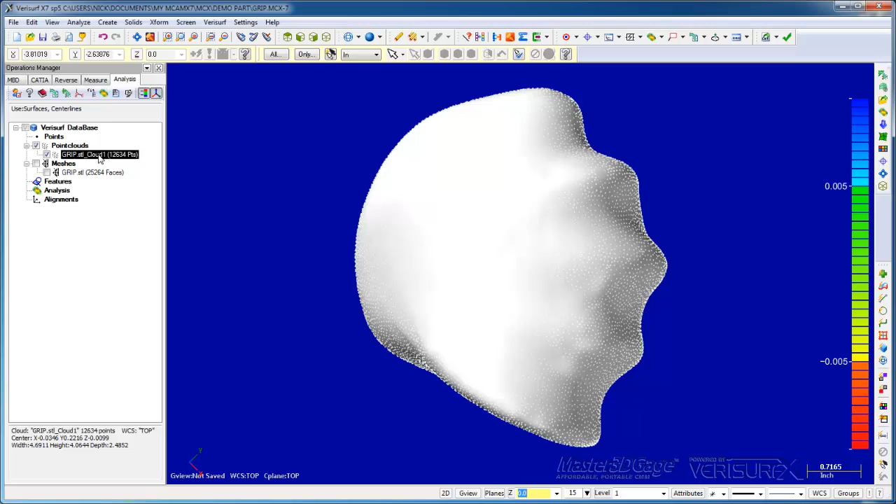In this case, using a color map is probably a better choice than lines. Say OK.

And I see blue and red, so I want to annotate that. I'll go ahead and choose balloons. It's worked in the past.

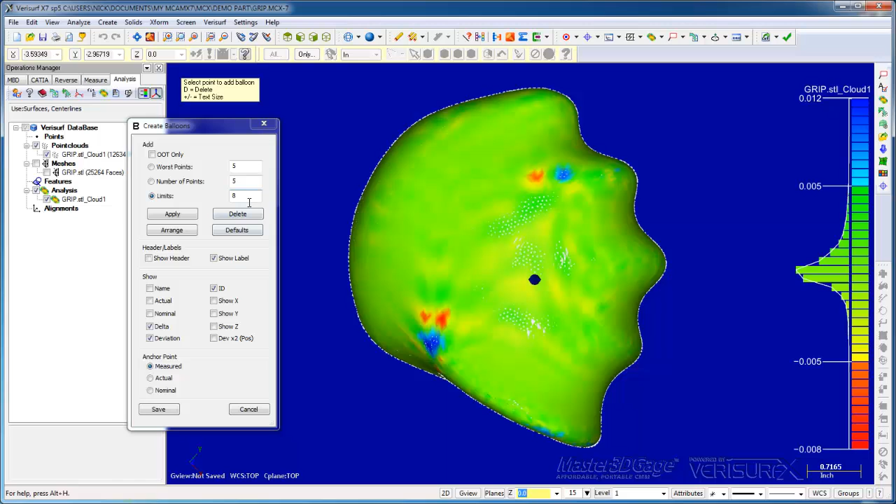We'll just apply limits, save, so we can see what the min and max deviations are. And of course we can go back and tweak the surfacing parameters if we want, but for our demonstration this is sufficient.

These are just two simple examples of Verisurf's reverse engineering tools. Verisurf's integrated solution enables reverse engineering workflows that include data capture, cloud editing, meshing, surfacing, and solid modeling, and conclude with surface validation.